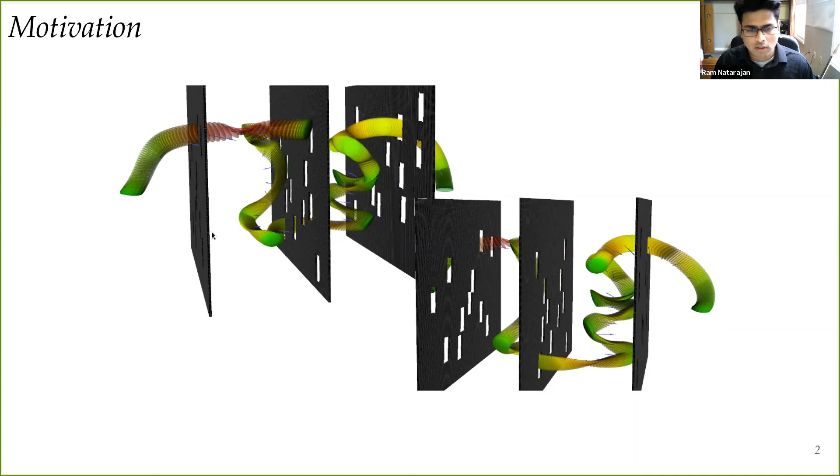So I'll try to motivate this by taking a deeper look at an example of an aggressive trajectory. Here we use an ellipsoid to approximate the shape of the quadrotor, and the trajectory is visualized using a series of ellipsoids. A planner that can generate aggressive trajectories for a quadrotor should be able to reason over the topology of the trajectory. In other words, find the right combination of these narrow gaps to fly through the environment,

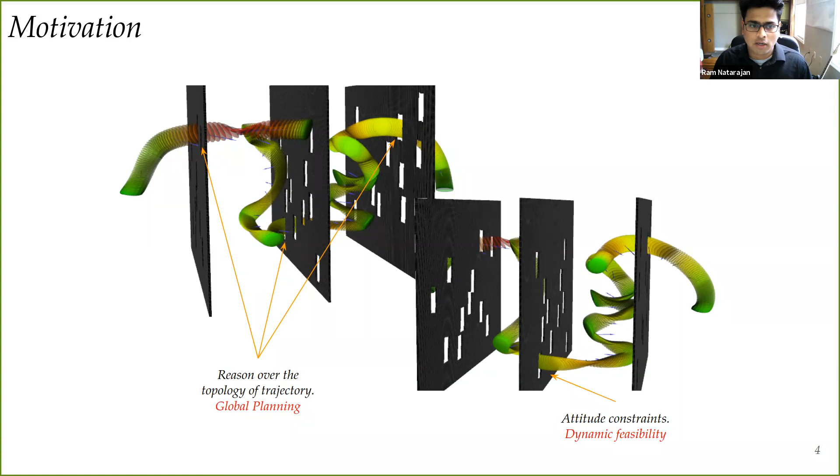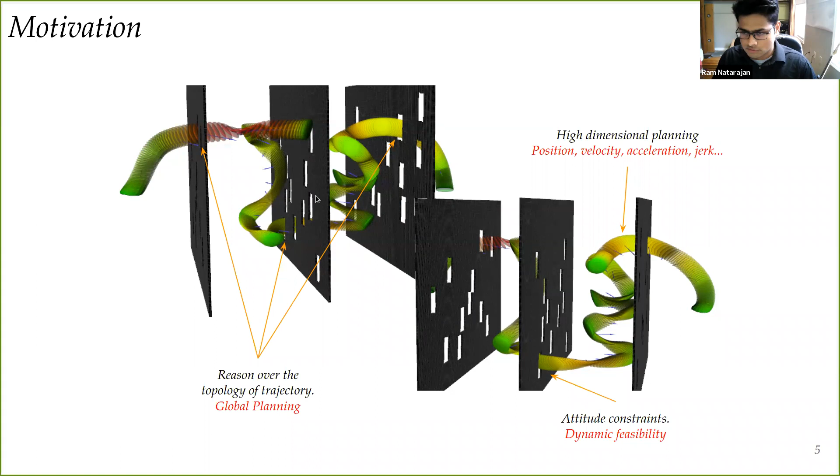and be able to do this global planning over large environments, satisfy attitude constraints, and generate dynamically feasible trajectories. At the same time, they should also be able to do this sufficiently high dimensional planning in the space of position, velocity, acceleration, jerk, and so on. In this talk, I'll present our planner, which has these properties and can generate trajectories for aggressive quadrotor flight. I will later show the same pictures and analyze the behavior of the planner.

Okay, cool. So graph search and trajectory optimization are two popular choices in motion planning with their respective advantages and disadvantages. Graph search methods are simple to use and usually have rigorous theoretical guarantees. They are global methods in the sense they converge to global optimal solutions or provide globally bounded suboptimal solutions. But on the downside, they suffer from exponential complexity, and hence they're mostly suitable for low dimensional planning. They also discretize the planning space, and hence can compromise the dynamic feasibility of the resulting plan.

On the other hand, trajectory optimization can be incredibly fast even in higher dimensional spaces, and can incorporate the system's dynamical constraints. But the disadvantages are they have poor convergence guarantees, or sometimes no guarantees on convergence for the nonlinear case, and they're only local methods that provide local convergence or locally optimal solutions. So we developed a framework called INSAT for complex dynamical and articulated systems that brings the best of these two schemes, graph search and trajectory optimization, and I'm presenting that today.

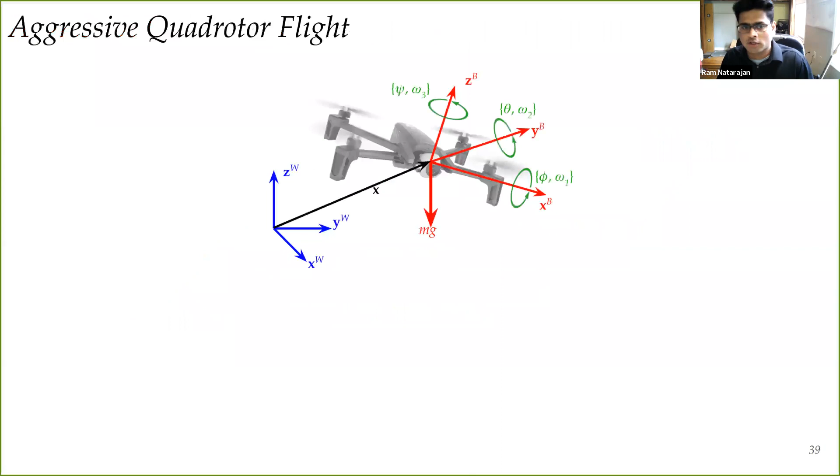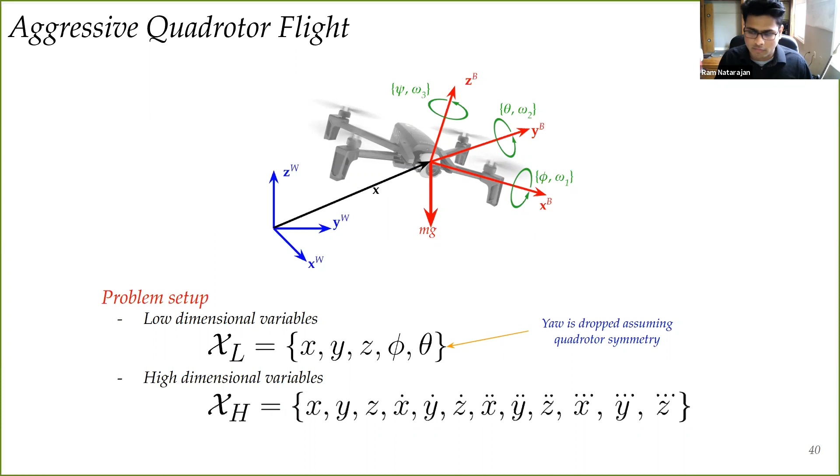So let us look at this case: a quadrotor has 6 degrees of freedom, 3 translational and 3 rotational degrees of freedom. The low dimensional subset is going to contain the x, y, z, and the roll and pitch angle. We are going to drop the yaw because we assume the quadrotor is symmetrical about the yaw angle. The high dimensional variables consist of x, y, z, its first derivative velocity, second derivative acceleration, and the third derivative jerk.

So mathematically, for aggressive quadrotor flight, the goal of the planner is to find a trajectory by minimizing the net jerk along the trajectory, and also the execution time. The trajectory that is coming out of the planner should respect the system's dynamics. It should satisfy the start and goal conditions and make sure that it is not in collision. And throughout the trajectory, the system should be within the limits of velocity, acceleration, and jerk, and also it should be within the control input limits.

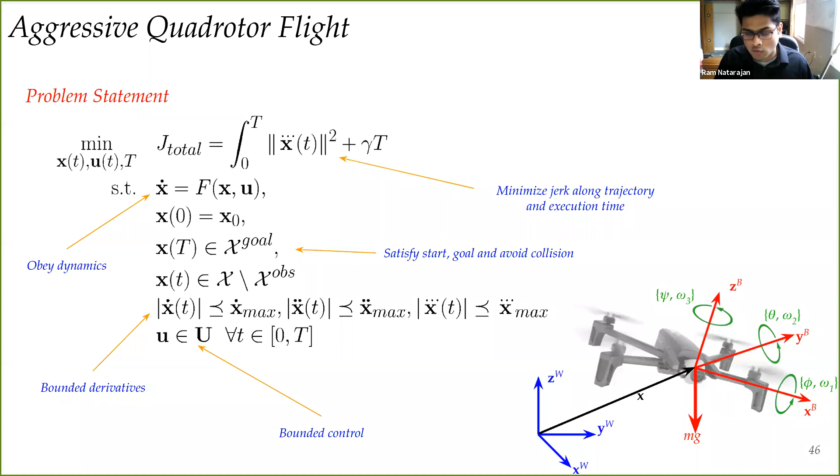So we run a typical standard graph search algorithm on this graph, which consists of a cost to come value for every node from the start, and there is a heuristic value, which is an estimate of the cost to reach from that node to the goal. So the cost to come is going to capture the cost from the start to arrive to that node. And then there is a heuristic value, which estimates the cost to go from that node to the goal. There is also a priority queue that dictates the order of expansion of these nodes in the graph.

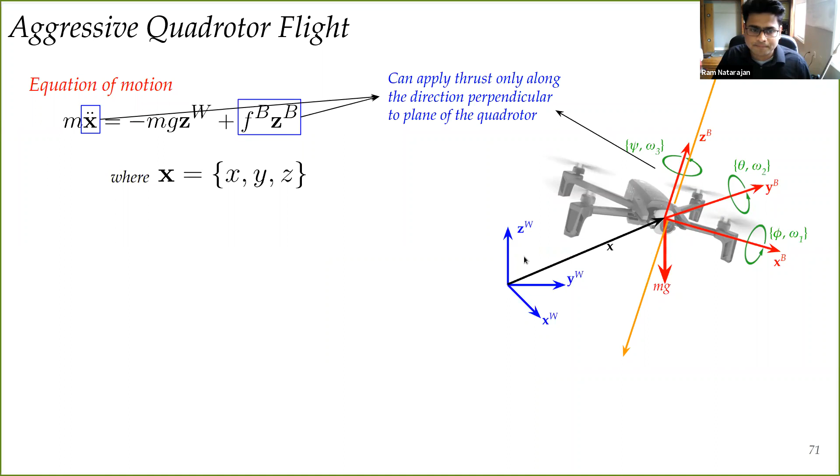But from the physics of the quadrotor, we know that the quadrotor can only apply thrust in the direction perpendicular to the plane of the quadrotor, which means it can instantaneously accelerate only in the direction shown by these orange arrows here. So using this intuition, we know that the attitude of the quadrotor puts a constraint on the instantaneous direction of acceleration. So we know the direction of acceleration given the attitude.

All we have to do is basically figure out the magnitude of the acceleration. That we can do by eliminating this free variable FB, which is basically the thrust exerted. We can eliminate this free variable to generate the equality constraint, and we can move the variables around to back out the acceleration value given the attitude. So this is the relation that we have coming out of this equality.

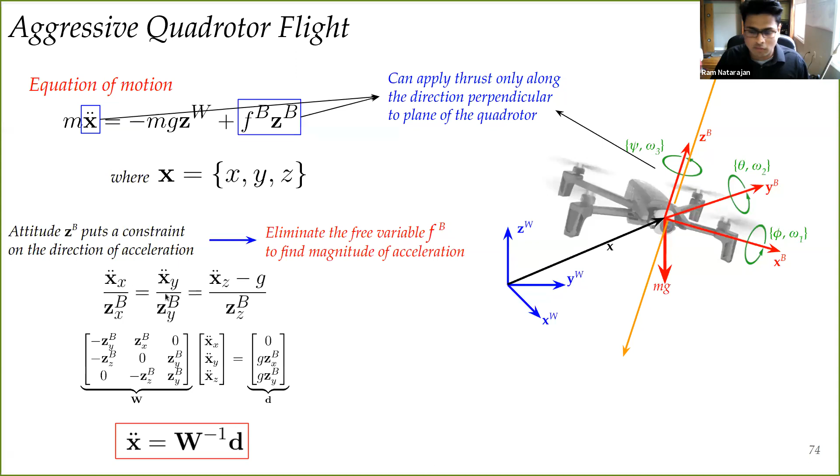So with this relation, let's go back to the trajectory optimization setup. Earlier we were just capturing the x, y, and z dimensions in the high dimensional space. Although the low dimensional space was imposing a constraint on the roll and pitch variables, those were not captured in the high dimensional space. So with this newly developed relation, we can replace the free variables, specifically the x double dot variable, so that we can capture this constraint imposed by roll and pitch from the low dimensional state into the high dimensional space, like we did here in each of these nodes.

So that is how we handle the trajectory optimization. That is how we capture all the constraints imposed by the low dimensional space when we go to the high dimensional space, and make sure those constraints are handled in the trajectory optimization during a call to an optimization.

So here is the final drill. We have the 5-dimensional low D space, which is running the graph search, and there is a 12-dimensional high D space running trajectory optimization. The graph search dictates what trajectory optimizations to run and with what seeds. And we use the relation that we derived in the previous slide to impose the constraints imposed by the low dimensional nodes into the high dimensional space.

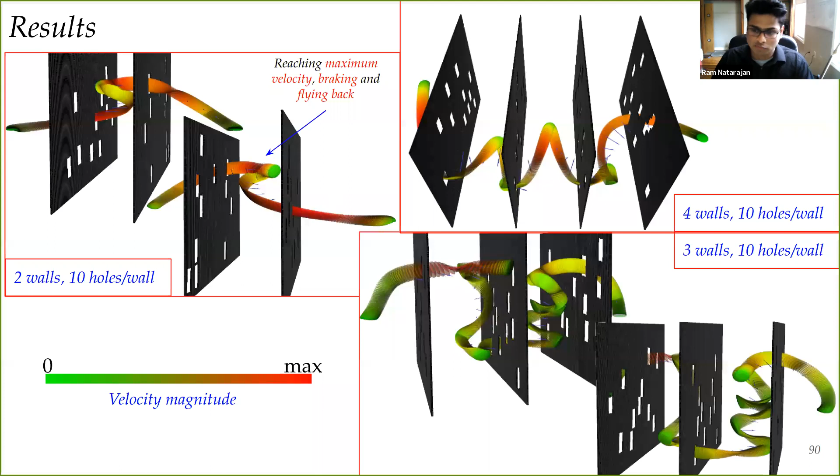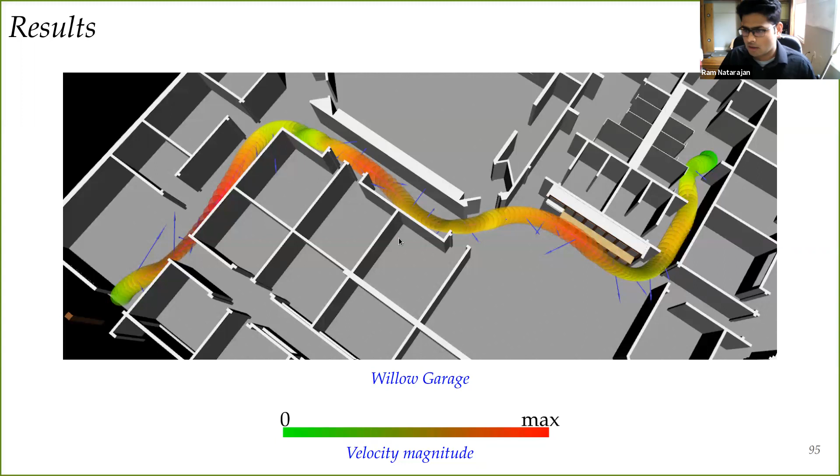So here is the visualization of the plan from INSAT in a different environment. This is the standard Willow Garage office, an indoor environment with a lot of cluttered spaces, and there are gaps smaller than the size of the quadrotor. So it has to again generate non-zero roll angles to enter these gaps. We use the same visualization here. You can see the planner once again generates a nice behavior to reach from the start to goal. I'll show a video of this later in the coming slides.

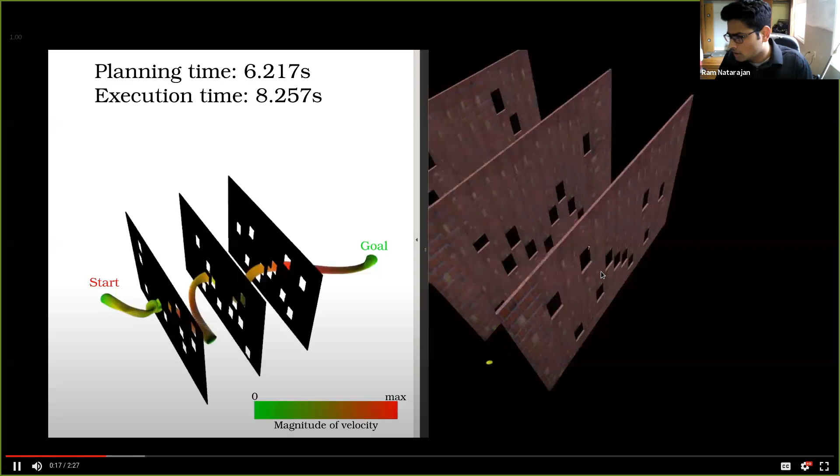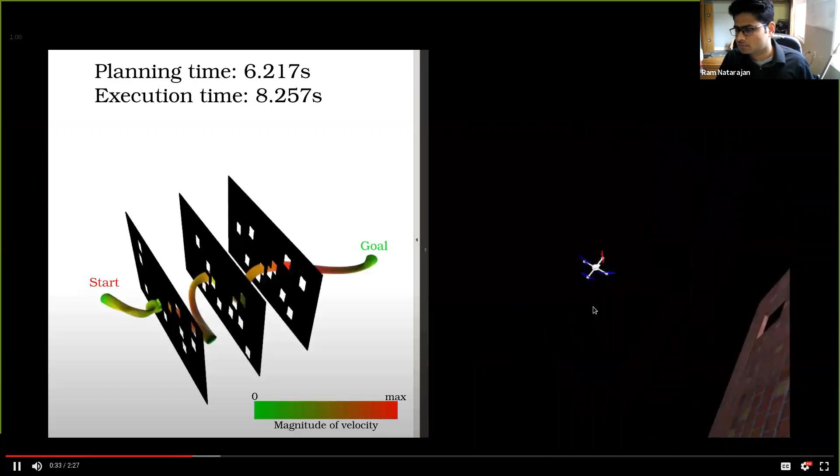If you cannot see the quadrotor here, it's really small. You will be getting a close-up view in the later part of the video. Here is the close-up video. As you can see, there is an attitude constraint that is imposed by this narrow gap because the quadrotor is larger than the gap, and it satisfies that attitude constraint.

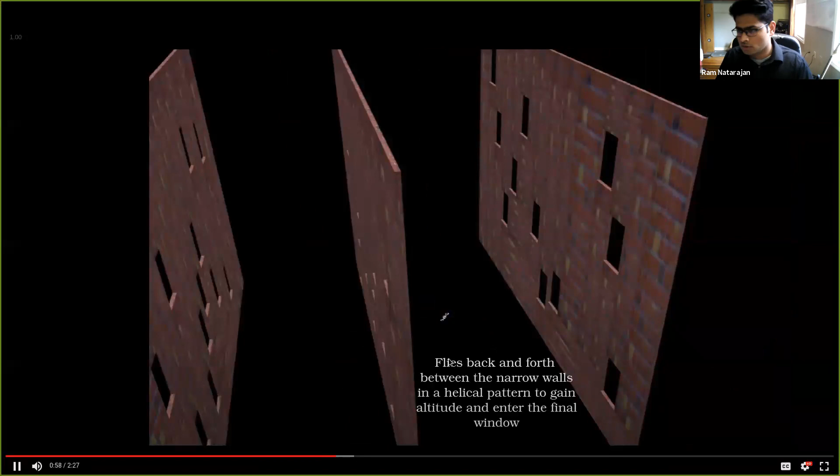And when it comes out, again, the quadrotor swings back and forth to accumulate enough energy so that it can satisfy the next attitude constraint, then again flies back and forth between the narrow walls in this helical pattern to basically rise up in altitude, and once again satisfy the attitude constraint.

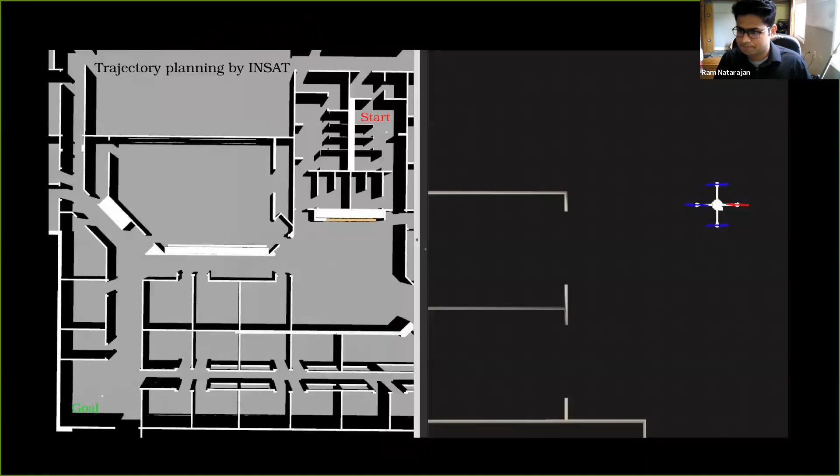So here is the Willow Garage office. This is a slightly different path from what I showed in the slides earlier, I guess. I think it is running with a different suboptimality parameter for the low dimensional graph search. But once again, we can see that in close-up.

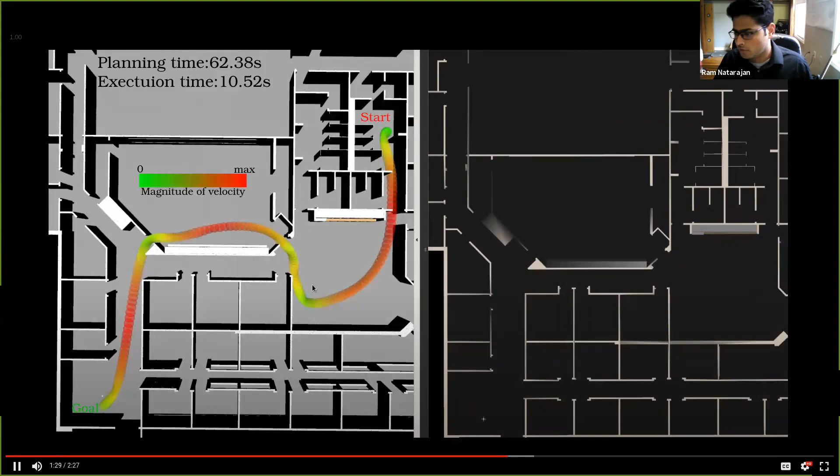So the quadrotor first generates this long suboptimal path to basically safely brake, and then enters this tight gap. And then there are these two gaps to negotiate. So it quickly negotiates these two gaps and then finally reaches the goal.

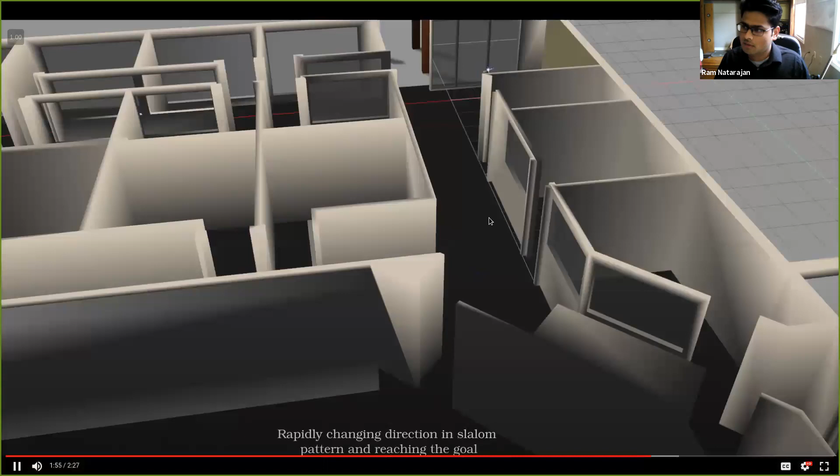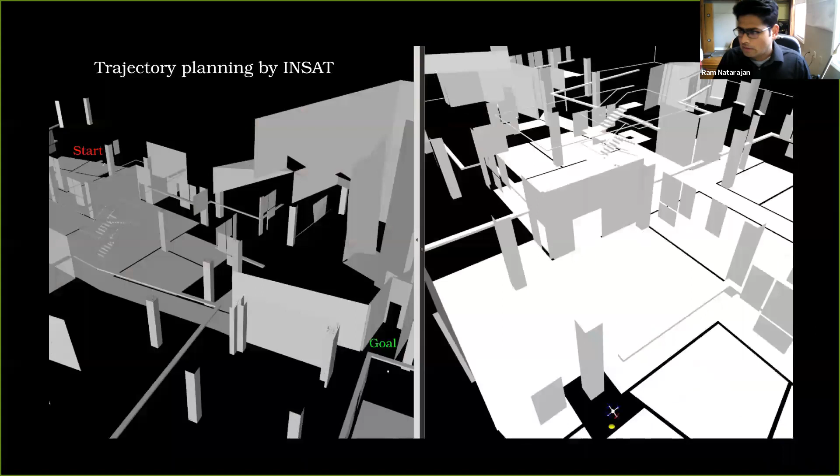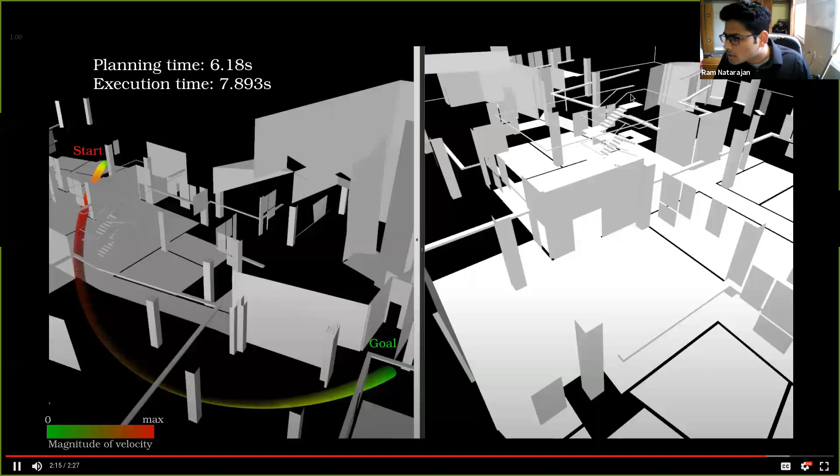So the final environment is the mighty Stata Center. I tested on this environment because it has more clutter than the Willow Garage, because that office environment looked slightly more structured. It's really hard to spot the quadrotor here. Sorry, because it's very small here.

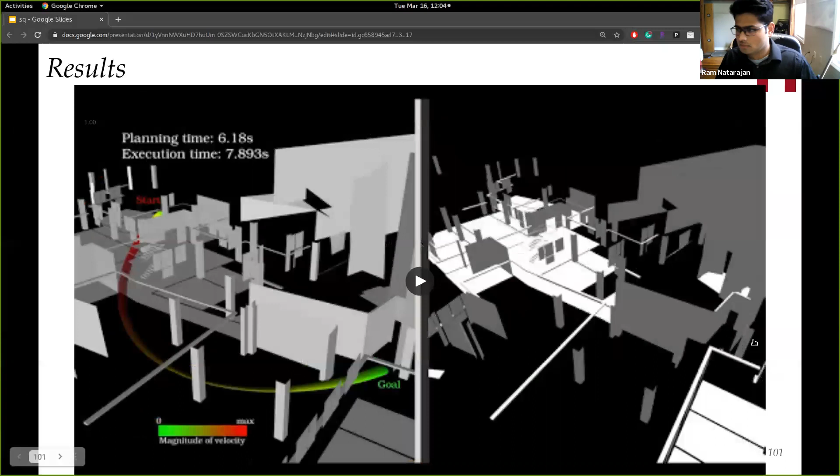Okay, so I will conclude my talk by summarizing what we saw. We introduced this meta framework called INSAT that can combine the benefits of graph search and trajectory optimization. Then we demonstrated how this framework can be adapted for the application of aggressive quadrotor flight. We also showed that INSAT is provably complete, and INSAT also generalizes to other applications like planning through contact. This is something that we have been working on recently.

So the future work: there are some downsides to INSAT. The speed of INSAT heavily relies on the smart formulation of trajectory optimization, and also the speed of the trajectory optimization. In the future, we wish to substitute that with faster black box or learning-based methods, so it can increase the overall speed. And also, tracking these trajectories is a huge burden on the control side.

I'm sure Alex Spitzer has an entire thesis on this. So basically we want to make INSAT a more incremental planner so that it can suit these real-time applications. With that, I will thank you once again for coming to the talk, and I'll take any questions.

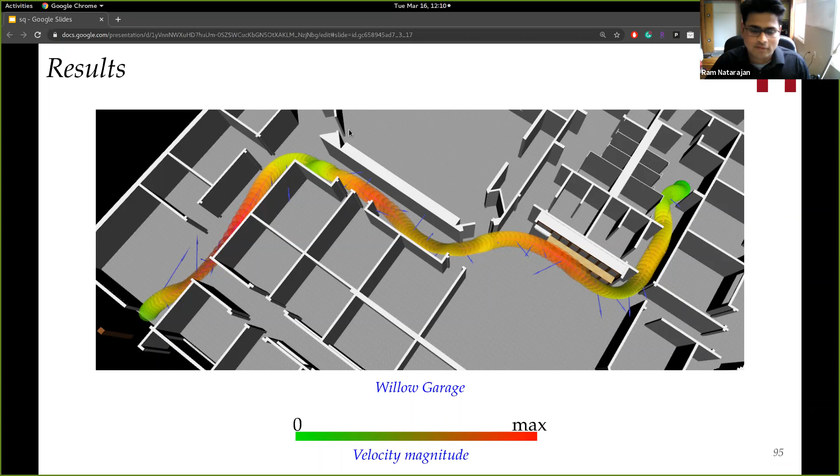No, there wouldn't be. But if you just wanted a theoretical answer, we assume that the low dimensional graph construction captures any path in this low dimensional space, and if this graph can capture it, then INSAT will find a path. However, if we miss that in the graph, then no. So yeah, it is very sensitive to discretization.

But the way it is still better than purely discrete methods is that in lattice-based methods, you're discretizing all the 12 variables, whereas here you're only discretizing those 5 variables, so there are fewer hyperparameters to play with.

Yeah. Okay, and how might you use environment information in this method? Is there any way you could use some kind of topological description of the environment to speed things up, or be less reliant on discretization? I don't understand. Can you repeat it? So currently, as far as I can tell, you're not using the environment to bias your discretization or the samples you're considering. Right. How much would you use a map of the environment to tell you where you should sample and give you better points to add to your graph search?

Right. So if I understand it correctly, you're saying we can do some kind of multi-resolution discretization of the environment that nicely captures free spaces and narrow gaps. Then yeah, it should work, because the framework is a meta framework, and if you replace the graph search component with a multi-resolution graph search algorithm, I don't see a reason why it shouldn't work. Does that answer your question? Yeah, I think that does.

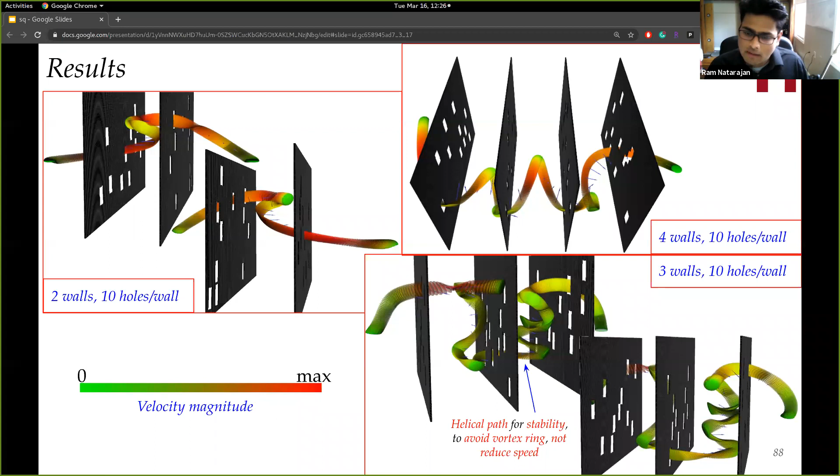Is it conceivable, for example, that you would have an agent learn a go-through-window skill, and you would compose a sequence of go through this window, that window, next window, a series of skills? Yeah, I think I answered that question slightly differently when I was saying we can maybe substitute these trajectory optimization methods with black box methods so that they have skills, and then we are just searching over the skills. In other words, the high dimensional planner could just be throwing out skills, like you were saying.

But then you're not doing trajectory optimization at the low level. Yeah, I'm not doing trajectory optimization at the low level. I think this method regresses to several other methods where we are just searching over skills. We're not doing trajectory optimization at the lower level. We just have these skills. Oh, I see. Okay.

So the reference that you are making is, if there are experiences in the lower level, how will I use that? I've flown through a lot of windows. I want to aggregate all that training data and turn it into a skill. I think if there is something that is coming out of an experience, maybe we handle that by giving them lower cost-to-come in the graph search, so that they get prioritized more than the newly generated nodes. That way you prioritize experience over exploration.